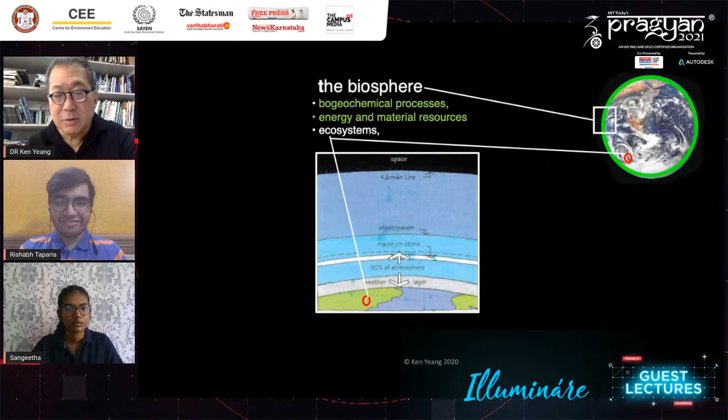Now, ecologists see the Earth covered by this thin film called the biosphere. Within the biosphere, there are the biogeochemical cycles, there's energy, material resources, and of course, there are units in nature called the ecosystems. The ecosystem consists of communities of plants and animals. Ecologists refer to these as the biological constituents and the physical constituents.

Now, within nature, there is human beings, which is part of the community of plants and animals, but we're different because we're the most powerful of all species in nature because we're able to change the landscape, we're able to change the ecology of the land, change waterways, change the seas and composition and the aquatic life, and now we've changed the climate.

Then the physical constituents includes our built environment, which is abiotic, and the built environment isn't just buildings, but actually everything that human beings make, which is cities, urban areas, structures, transportation systems, artifacts, and food, and so forth.

So now, in a diagram, our built environment takes in inputs from the biosphere and gives us outputs of energy, materials, and so forth. The inputs consist of energy, materials, water, food, people. The built environment has impacts over its entire life, which is the first environmental impact, the operational impact, the end impact, and gives out outputs of energy, materials, people.

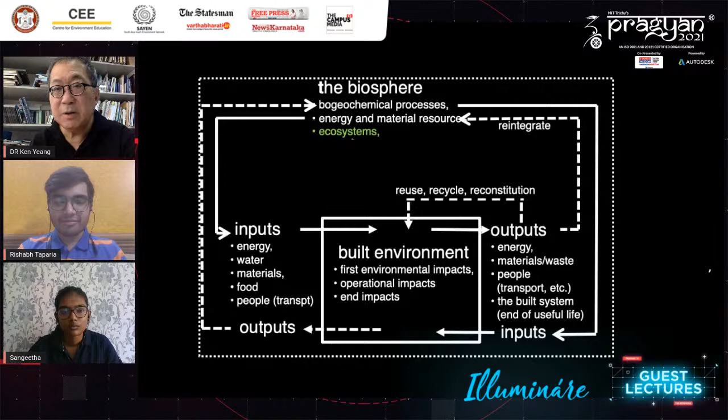The built system itself, at the end of its useful life, becomes an output, and these have to be either reused, recycled, reconstituted, or reintegrated. Otherwise, we'll just collect in the biosphere.

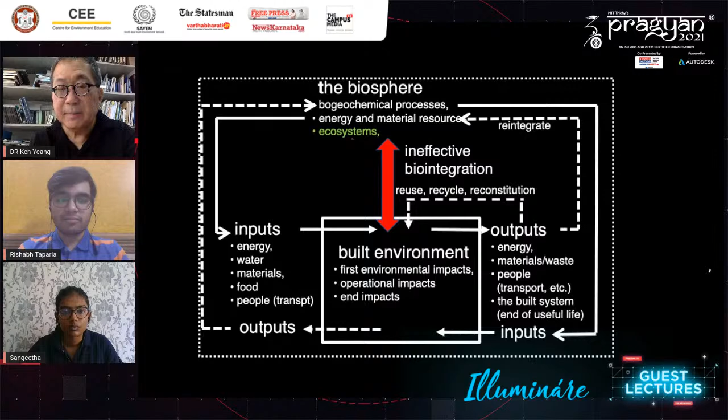Now, what has happened in the Earth now is that there is ineffective biointegration of our built environment with the biosphere. With the ineffective biointegration comes the contamination of the environment, the inability of nature to sequester the emissions they make out, and this has resulted in a devastation to our natural world.

Everything depends on effective biointegration. So whatever we do, there is similarity with what in medical sciences with the design and development of prosthetic devices. A prosthetic device is something that is artificial, it is synthetic, it is human-made, and in prosthesis it's attached to a host organism, which is the whole human being.

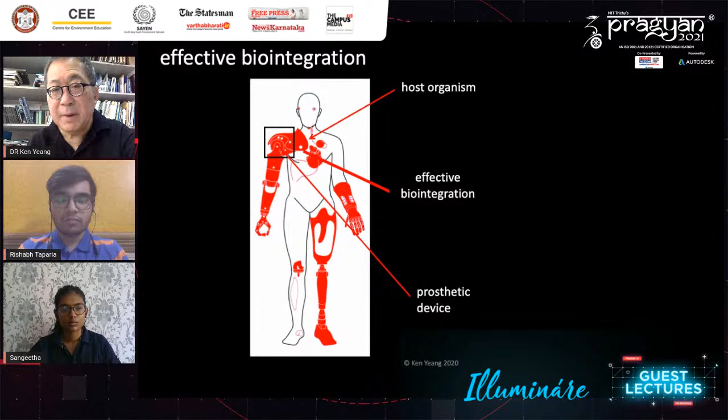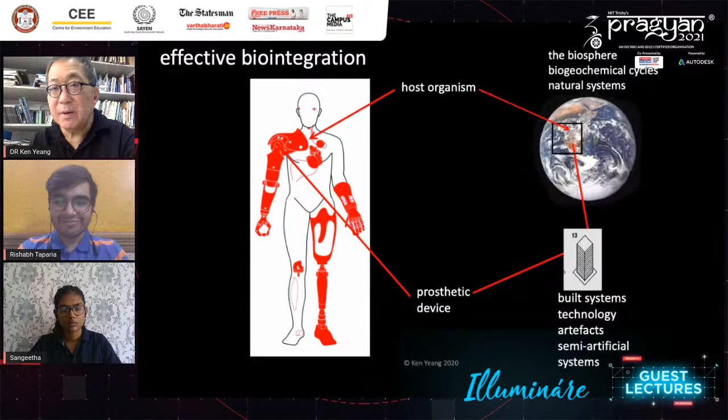Then everything depends on effective biointegration. Now, by analogy, our built systems are prosthetic devices. It is artificial, it is synthetic, it's human-made. So what is equivalent in the host organism? That's very simple. That's the Earth itself. So everything then depends on effective biointegration between the built systems and the biosphere.

If it's ineffective, then it causes environmental impairments. And so this is the idea that I had, which is the basis for all our work, is that what happens if our built environment is built to emulate and to replicate ecosystems, to become human-made ecosystems.

This is the challenge of ecological design. If we're able to achieve this, then there won't be any environmental impairment. Of course, this is easier said than done. This is what we must all strive to do, is to redesign our built environment to emulate and replicate ecosystems.

I'm going to go through some of these and show how we try to interpret this in our work. The first one is ecosystems biological structure. If you look at this ecosystem, it has communities of plants and animals and a physical environment.

If you look at the room, the building, the city you're in, everything is mostly abiotic, inorganic. There's very little biotic constituents. So if we were to design buildings as constructed ecosystems, then we must have a full complement of both.

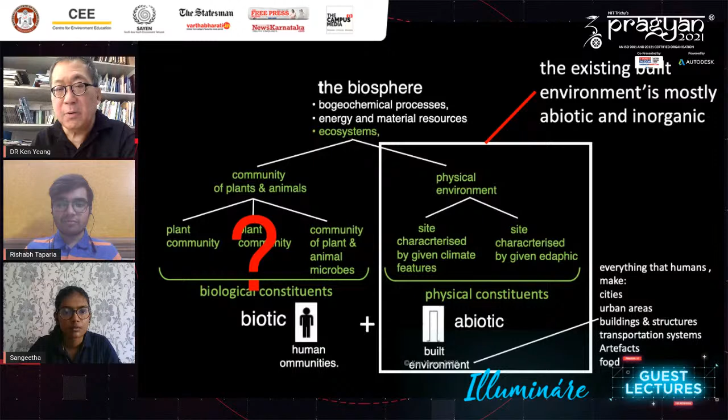From an ecological point of view, this is the most preferred because it is continuous. By being continuous and linked, there is a greater pool of natural resources to be shared among the species, and by being connected it enables species interaction. By enabling species interaction, it engenders a much more biodiverse ecosystem, and by being diverse, it's much more stable. So this is the preferred pattern.

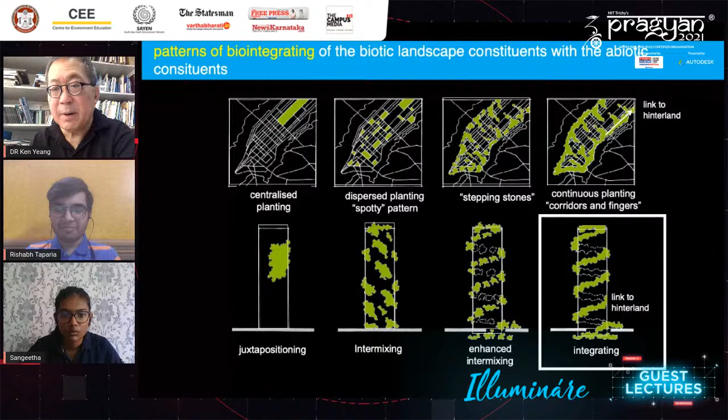So with this, I'll start looking at how we can integrate this by design in our built environment, in our buildings. This is one of the early buildings I did. I designed continuous vegetation starting from the ground, from the basement, moving up to the top of the building in a spiraling pattern.

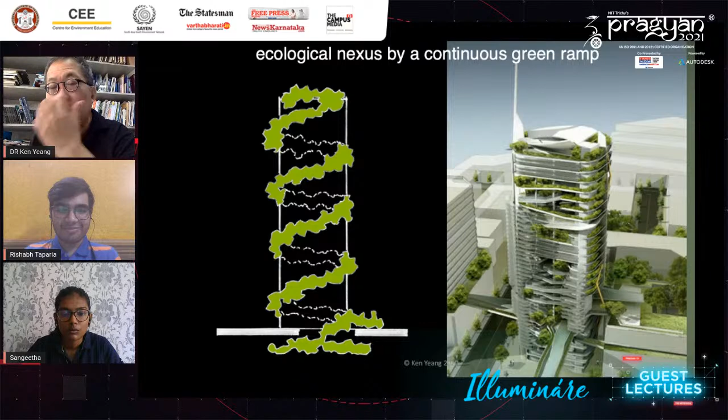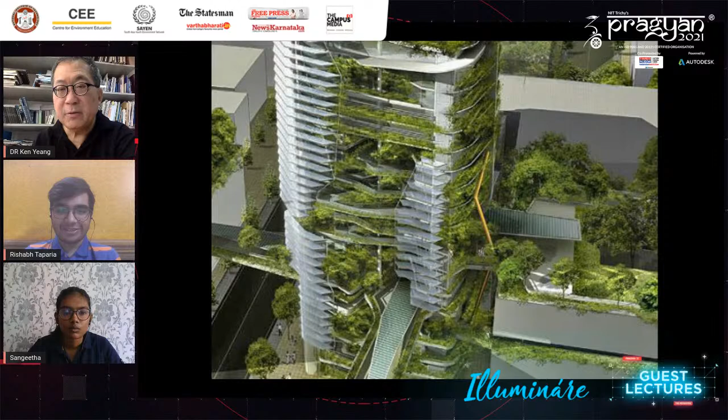So this is what the plan looks like. The vegetation on the outside is continuous, as a ramp going up the building. The whole idea was that as the ramp reaches the same level as the adjoining building's roof, you would then bridge over and vegetate the roof. In this way, this becomes the catalyst to making the whole city green.

This was an idea which was never quite implemented, but that was the principle of that project. The next is to look into ecosystems biodiversity. A built environment has very low ecosystem biodiversity because it's just us human beings and very small species such as cockroaches, rats, and little animals.

I started to look at different parts of the earth and its biodiversity, and you notice the biodiversity is highest near the equator, and it gets increasingly less as you go above in latitude towards the 70s. So the approach then is to create habitats within the built environment. Habitats could be green walls, green structures, green terraces, green atriums, green areas on the ground, and so forth. This is the approach we adopt whenever we design, to create habitats within buildings.

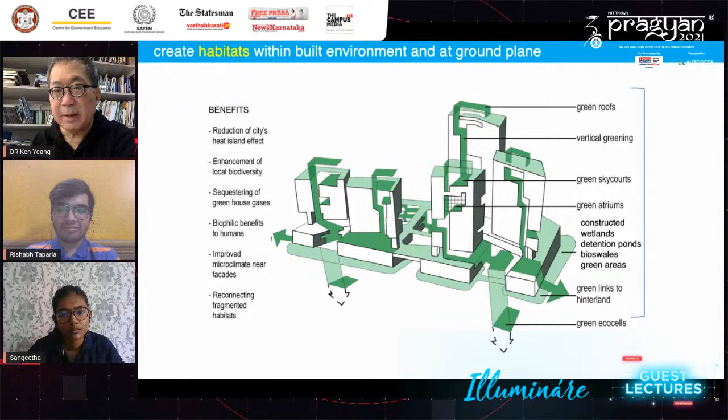Now, to illustrate this is the project that we recently completed about a year ago, in Putrajaya, the capital city of Malaysia. These are the habitats where we located them within the building, on the walls, the sky courts, on the ground, and on the edges of the building.

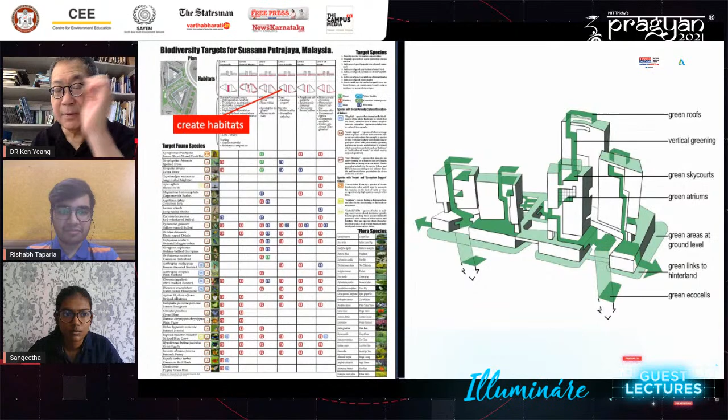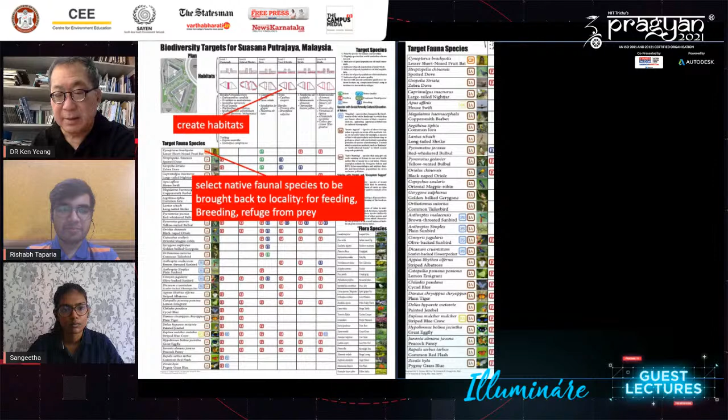From there, we look at the integration between the habitats and the species, and we use these as a basis for the landscape design and design of the habitats. So in a nutshell, this is our approach to increasing the biodiversity of the locality, to balance the biotic with the abiotic.

Now, if you look at some of my buildings, it's just an intention, an indication of what could be achieved, because it's very difficult to persuade clients to let us do this in an absolute thorough way.

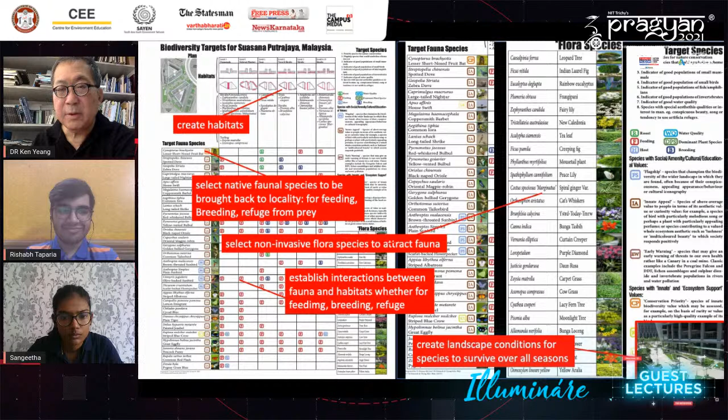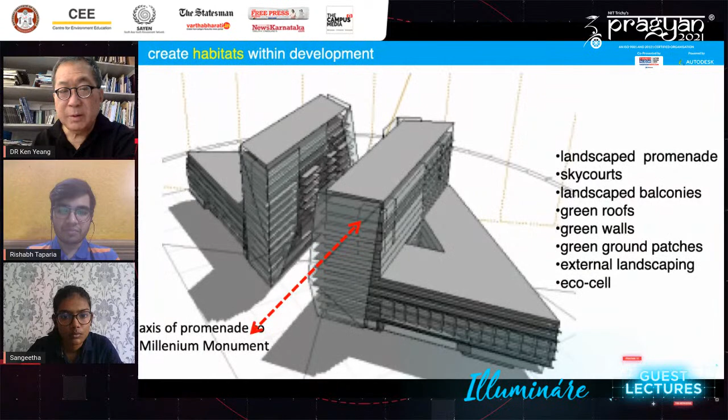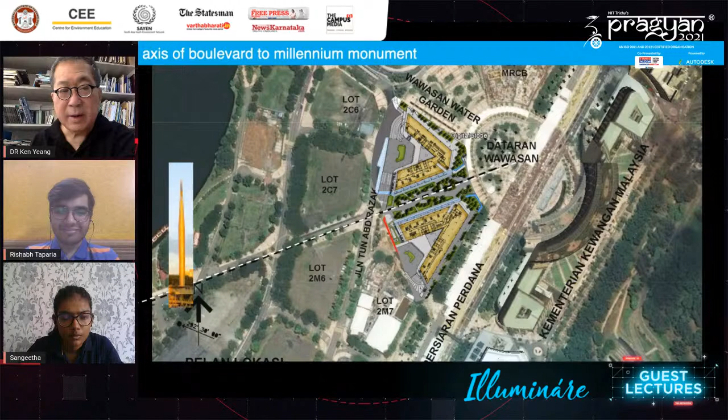Here's the master plan showing our two buildings, which are almost symmetrical chevron-shaped buildings from the square going down to the monument at the bottom. The monument is next to the Ministry of Finance buildings, designed by another architect, a friend of mine. This is a promenade between two buildings, and we put seating areas that people can sit and relax.

The facade is a double-skin facade where we experiment with fritted glass panels as an alternative to horizontal louvers. This is the pattern we want to give the facade, and then we slice it to make it more porous. The pattern we use is the cultural pattern of the Malay community. The first image is the outside, the fritted glass, about 50% clear and 50% opaque. The second image shows what it looks like from the walkway between the outer and inner skin, and the third shows the structural support for the facade.

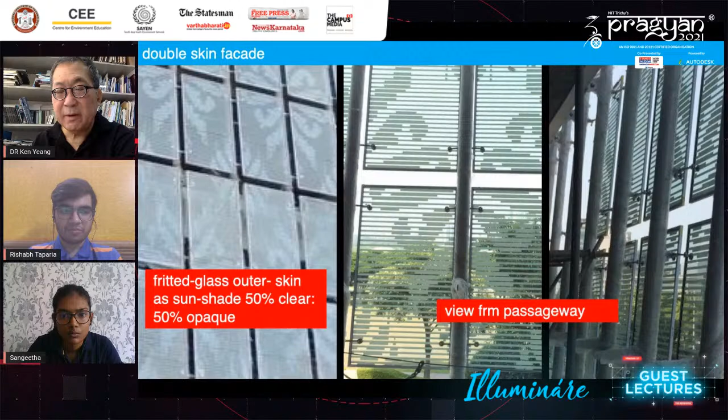The energy index is about 136.18 kilowatt hours per square meter per annum, compared to a conventional building, which is 210. So by all means and purposes, these figures and studies show that the fritted glass works as a substitute to the horizontal louvers.

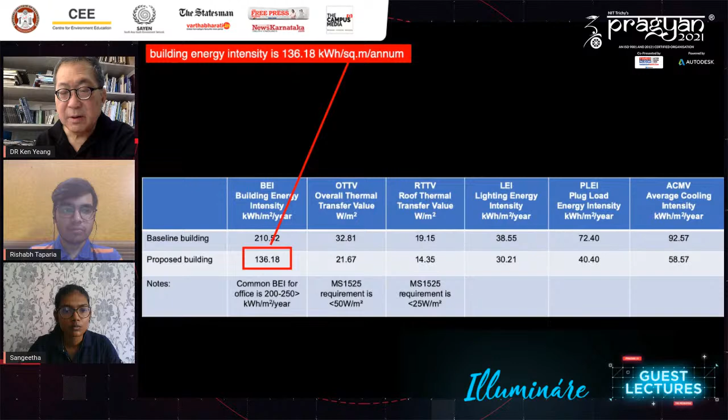On the west side, we wanted to protect from the hot western sun, and because the building isn't exactly east-west, we angled the facade to face the sun. The horizontal slots you see are actually the sky courts, and people can go out to look out, and these sky courts are now fully planted.

You should see a lot of vegetation in these sky courts. We also brought the vegetation all the way from the third floor down to what we call the Ecocell.

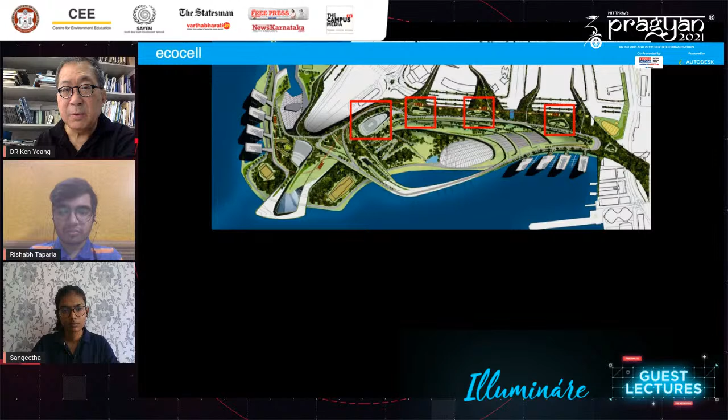The Ecocell is an idea we developed a few years earlier. This is our master plan for the Kowloon waterfront, and these are the Ecocells that we cut in the podium going all the way down to the waterfront. These are actually voids that go from the top of the podium down to the waterfront. It integrates vegetation down to the lowest floor, provides opportunities for rainwater harvesting and collection, and provides natural ventilation to lower floors. It brings daylight, and at the bottom we can put an eco machine or a biosphere.

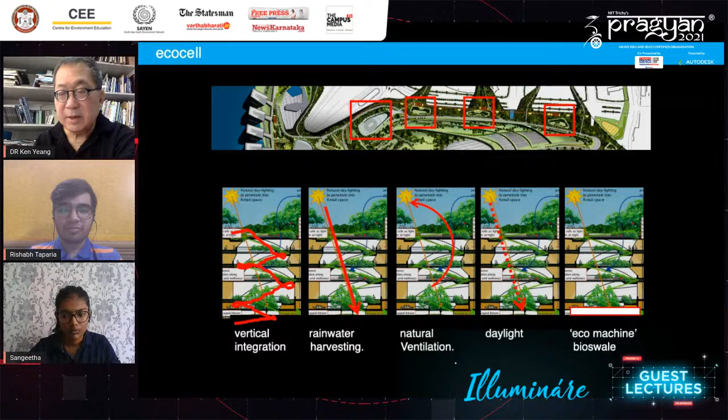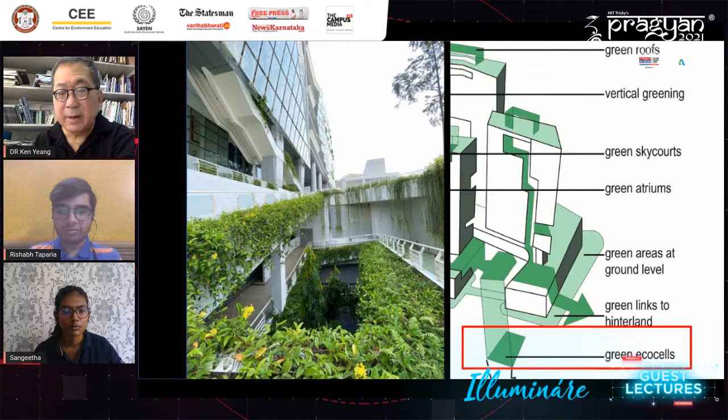So this was the Ecocell idea, and we implemented it in the earlier building. This is the Ecocell right at the bottom; we bring it down to the ground. Here you can see the vegetation from the third floor in a spiraling ramp going down to the basement.

Now, the next is ecosystem connectivity and nexus. What is evidently clear is that everything in nature is connected, and you cannot artificially partition the built environment, human society, one species, or one locality from the other. For instance, COVID has indicated that protection from infections actually has to be an international global effort.

So how do we connect nature, how do we enhance connecting nature? Because human beings fragment nature, they chop it up into pieces. One of the ways we try to address this is to bring an ecological network as a spiraling series of planters that goes all the way up to the roof.

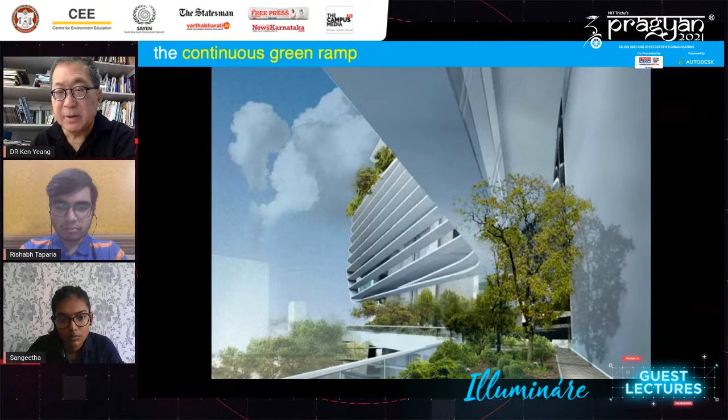We should connect not just at the ground floor, but also vertically, all the way up to the top of the building. For this building in Singapore, we put the planters on the outside of the facade, as you can see in this diagram. This time, we put a walkway so you can service the planters without going through the internal areas. Here it is built—you can see the planters, the walkway, the sun shading, and the glass facade at the back.

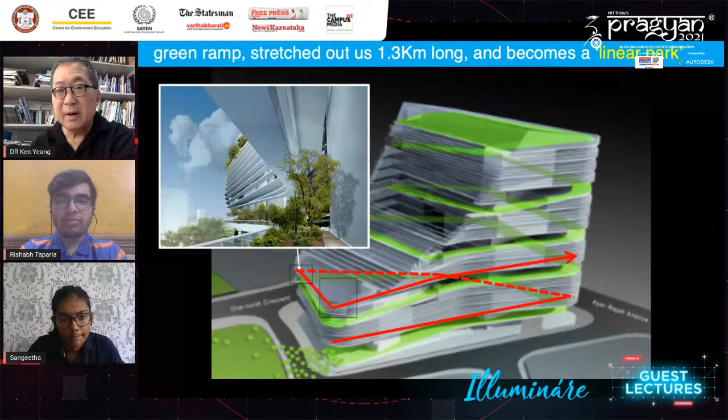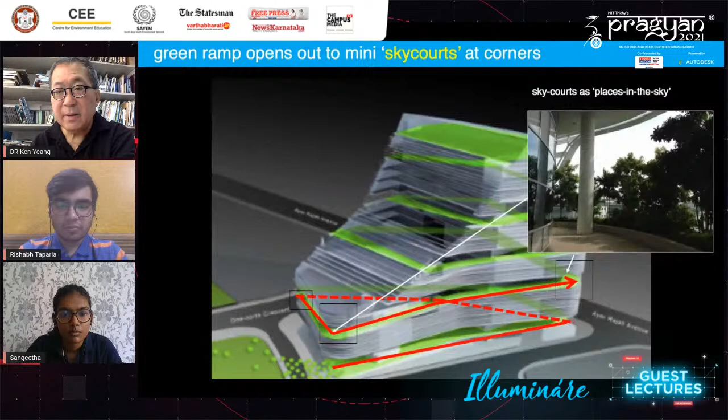For every facade, we climb up one floor, and we call this a linear vertical park. If you stretch it out, it's 1.3 kilometers long. You can see the walkway that spirals up the building, and then at the corners we punctuated with sky courts. These two sky courts at the corners bring daylight and vegetation, so the linear park opens out into these sky courts as it reaches the corner.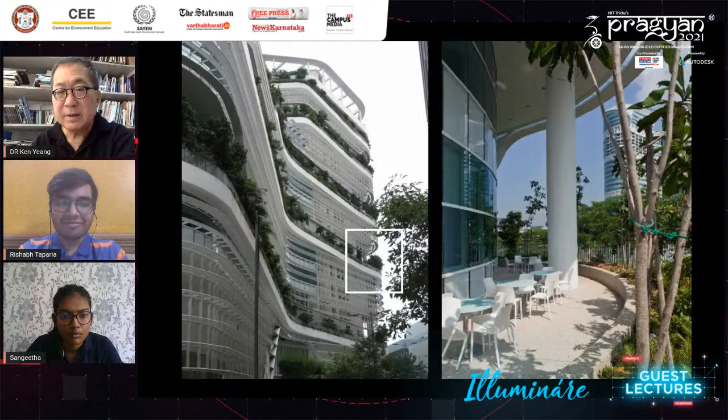These obviously provide spaces for people to eat and to drink and to have a cigarette if they wanted to. I call this the mini plazas at the sky courts at the edges of the building.

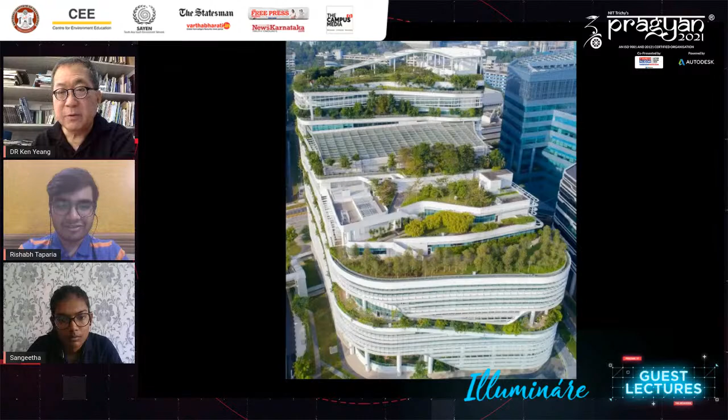The building actually consists of two components. At the mid level I have a roof garden, and this is the mid level roof garden, and the top is the roof garden itself with a panoramic view of the surrounding.

The green index required in Singapore is 6 - that means the ratio of greenery off the ground with the green in the building. Here we achieved 12.2, so we far exceeded the green index required by the authorities.

The building is actually two components, A and B, linked by an atrium, and the two blocks are linked by a bridge.

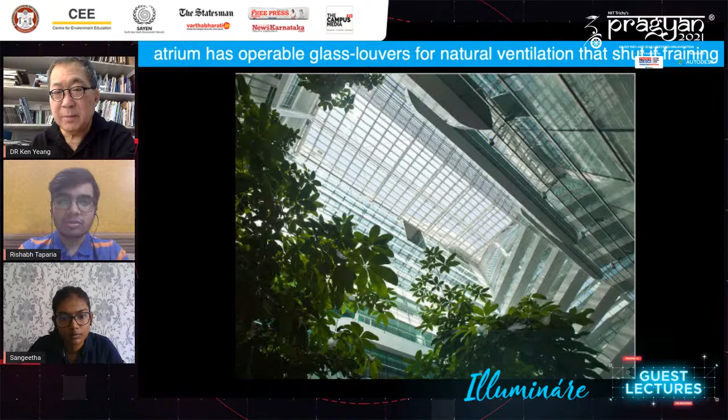This is the atrium between the two blocks, and above the atrium is an operable glass louvered roof, which is open most times of the day so that hot air can go out. But if it rains, it has automatic sensors so that it shuts and is closed to keep the rain out.

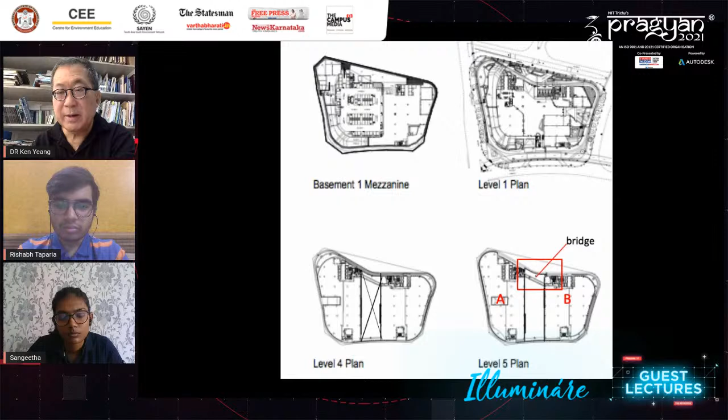And then the two blocks are linked by a bridge, as you can see in the bottom right-hand plan, and the bridge links the two blocks together. And then we have a number of experiments in this building.

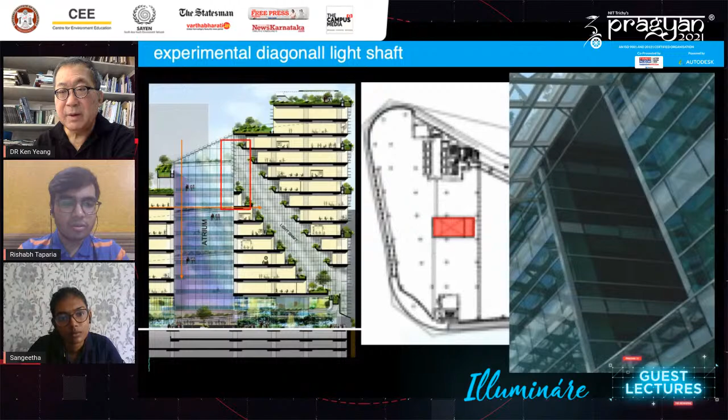One of the experiments is what we call a diagonal light shaft, which cuts all the way down to the bottom of the building. At the top of the light shaft, it opens out into the atrium, and from the bottom looking up, you can see the atrium roof, and looking down, you can actually see the street.

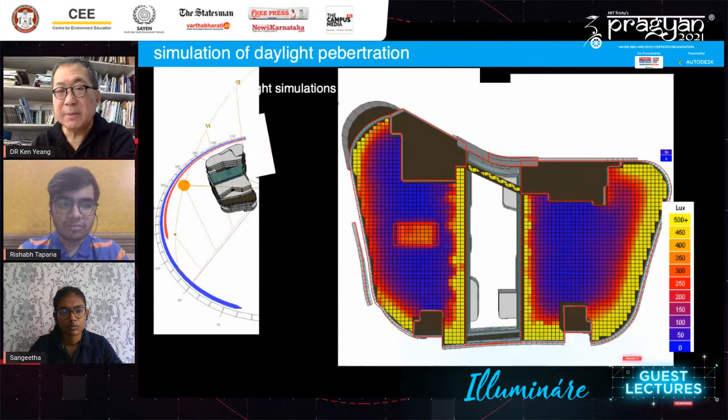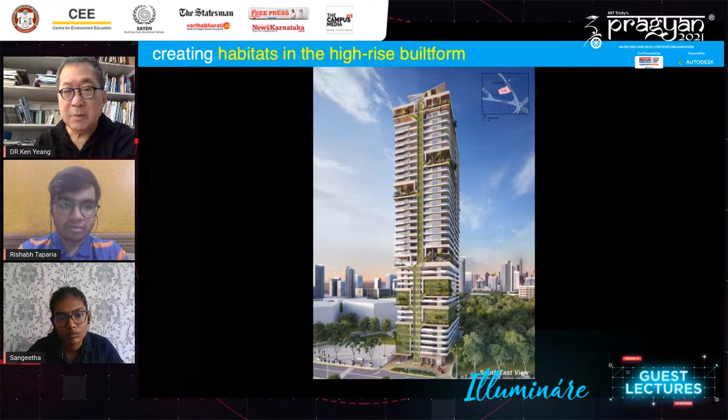Now, how do you do this with a high-rise building? This is one of the buildings now under construction - it is the Skylon building - and we start by looking at the biodiversity around the site. The site is that red dot you can see there.

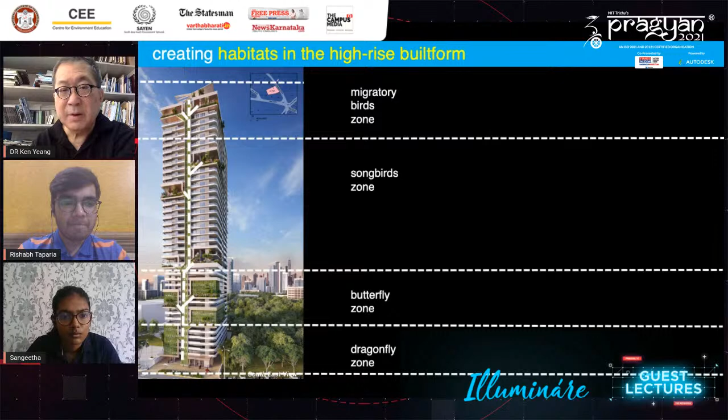We look at, we study the species in that area, and we concluded that one of the ways to do this is to create vertical habitats in the building and use it to attract birds and butterflies and insects. So the lower floors we call the butterfly zone and the dragonfly zone. The middle is for the birds, songbirds, and the top is for migratory birds.

This is the biodiversity matrix for the entire building, which is the vertical biodiversity matrix. So that was how we adapted the idea, the biodiversity matrix idea, to a vertical building instead of a medium-rise or low-rise building.

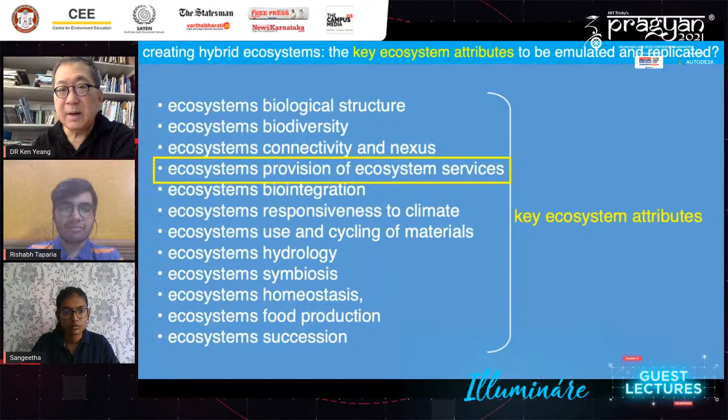Now, the next property of the ecosystem that we need to emulate is the provision of ecosystem services. What are ecosystem services? Ecosystem services are services that nature provides for us without any human intervention.

Nature does this for us for free. Nature produces oxygen, maintains the biological and genetic diversity, purifies water and air, provides storage and cycling of global distribution of fresh water, regulates the chemical composition of the atmosphere, and maintains migration and nursery habitats for wildlife, and so forth. All these are done by nature without human intervention.

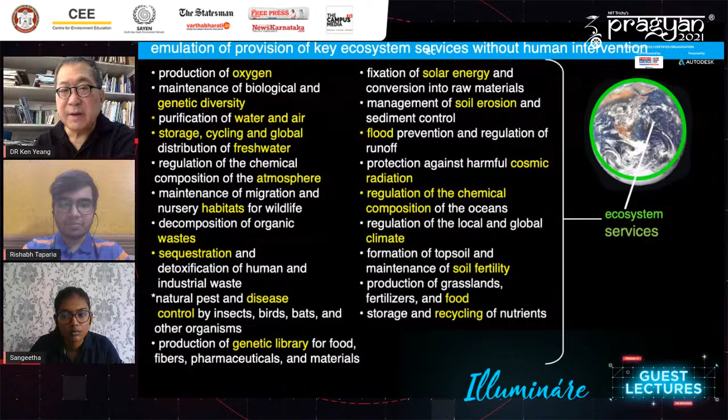So we need to try and emulate this if we can in our constructed ecosystem. Then it became clear to me that it is such a massive task, it's impossible to do this technologically.

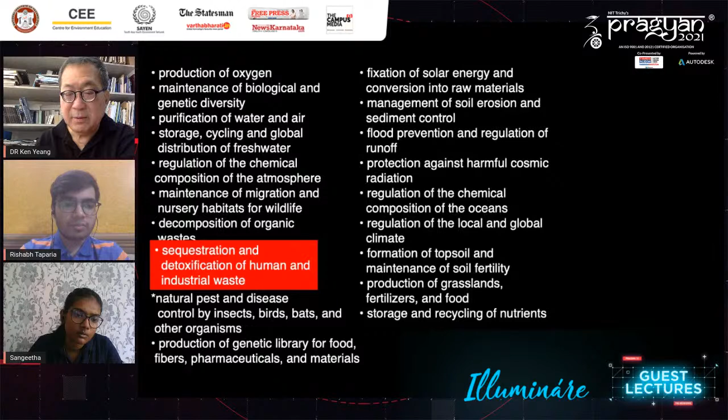So what we try to do is use as much technology as we can to emulate it, like this building in which we emulate the production, photosynthesis, and production of energy. Nature sequesters and detoxifies the emissions that we discharge into the environment.

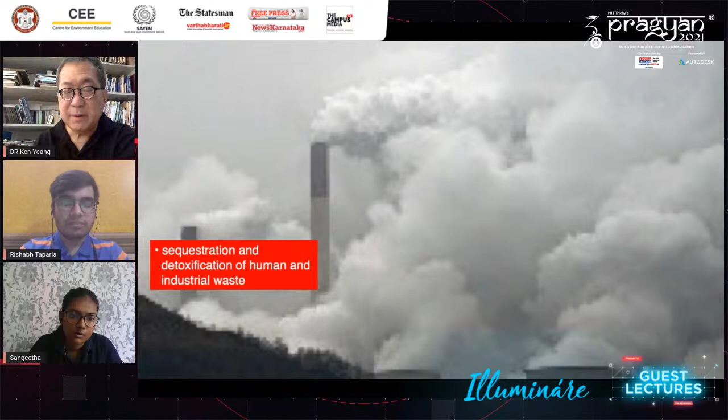But what is clear is that we cannot do this 100%. Nature is too big, too vast, too capable to do this. But what we have done is the opposite - we have emitted more gases than nature is able to sequester. Because of this is the cause of contamination of the biochemical cycles, and this is the cause of climate change. So I started looking at ways to how we can emulate the production of ecosystem services.

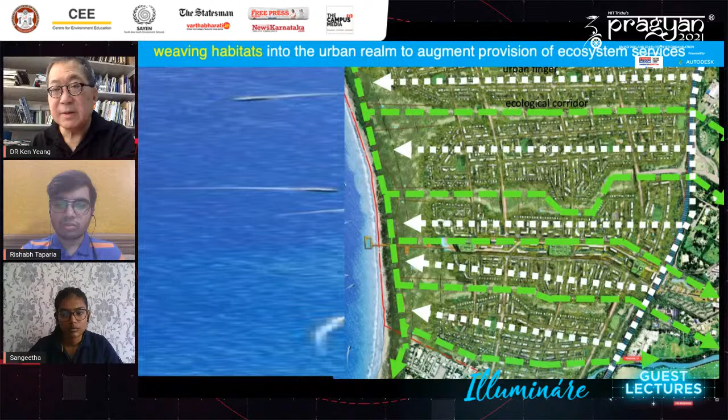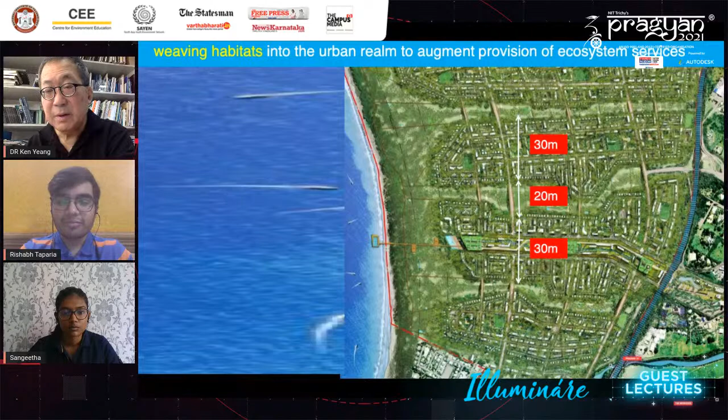The green fingers are close enough to the urban areas to provide ecosystem services into the built area. We cannot replicate ecosystem services, but we augment the urban areas with green areas. This is what the master plan looks like - the white is urban areas, and we try and weave the two together like clasped hands. Our design has about 30 meters between each finger, 20 meters wide for the ecological fingers, and 30 meters for the urban areas. That was the approach to provide ecosystem services into the built environment.

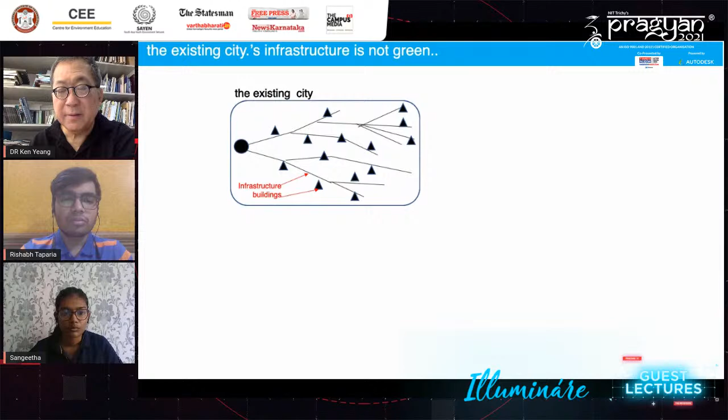Now, on ecosystem bio-integration - what is clear is that our present approach is inadequate, because if you look at the city you're in, it has existing infrastructure which is not green. So what green architects do is build green buildings onto the existing infrastructure. Some of these green buildings are autonomous and can exist without the infrastructure, but most still need the infrastructure as a supplement.

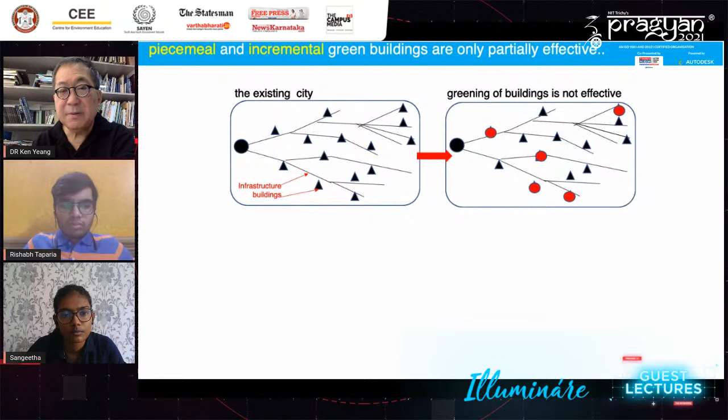So the proposition is: what happens if we start with the green infrastructure first? Then it makes the green city much easier to produce. What this means is that if you are a green architect or planner, you must start with the green infrastructure first - make the infrastructure first. Then all the buildings we put in are much easier to make into a green city.

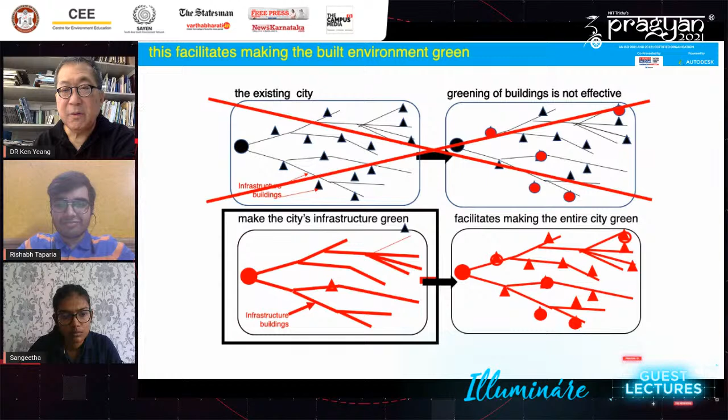So this is a different level of thinking. If I were to leave one idea in your head when you leave this lecture, it's this: start with the green infrastructure. Design the infrastructure - the electrical system, the water supply system, the energy, the sewage system, and the IT system - to make it green before we start working on the green buildings.

So I started to think that maybe the key infrastructures is nature, which itself is infrastructure. Human society - our social, economic, political, and educational institutions - is an infrastructure. Then there's water. Although water is part of nature, I've taken this out because water is what life is all about, and the hydrological cycle is infrastructure. And then there's our built environment, which is two levels of infrastructure, external as well as internal within buildings. Ecological design is the integration of all these four together into a whole.

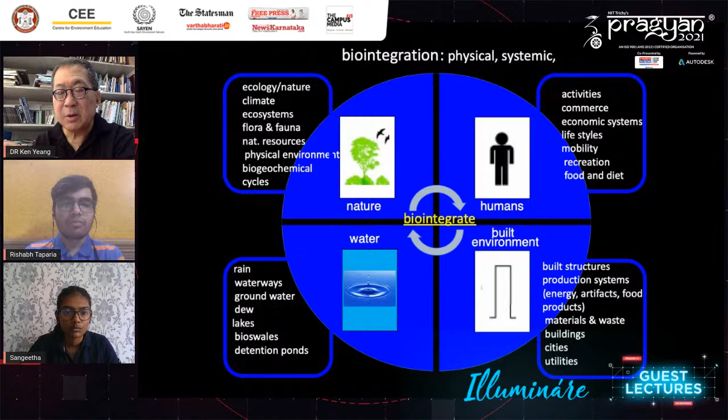Now this is a diagram of aspiration. To effectively achieve this is extremely difficult, and this is what we must all do as ecological architects and planners. Of course, if you so lead and list this out, then there are a lot of things to be done.

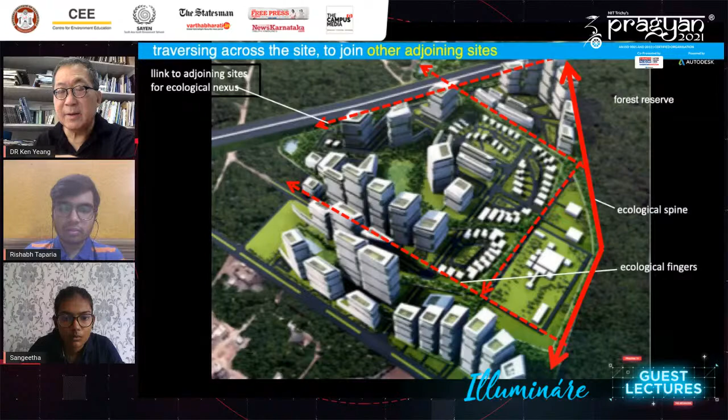Now this is a scheme we designed in Bangalore, where a development is right next to the forest reserve. The approach is to start with the ecological spine along the forest reserve to collect all the species, then bring it through the site in a series of ecological fingers, and connect to other sites so we can extend the connectivity, the ecological nexus, to surrounding sites. So this is the master plan - you can see the spine on the right-hand side, brought through to the edge of the site and surrounding areas.

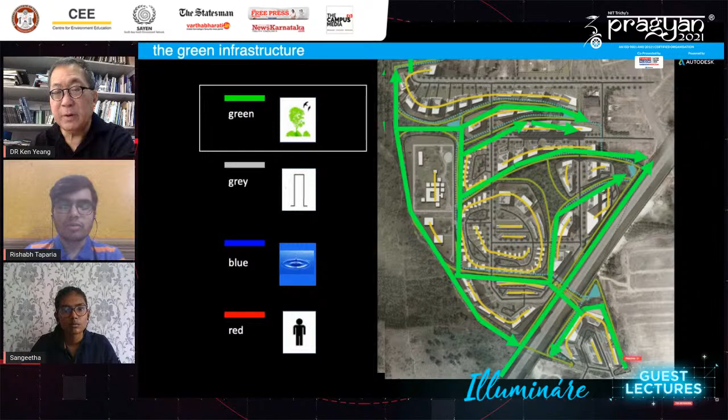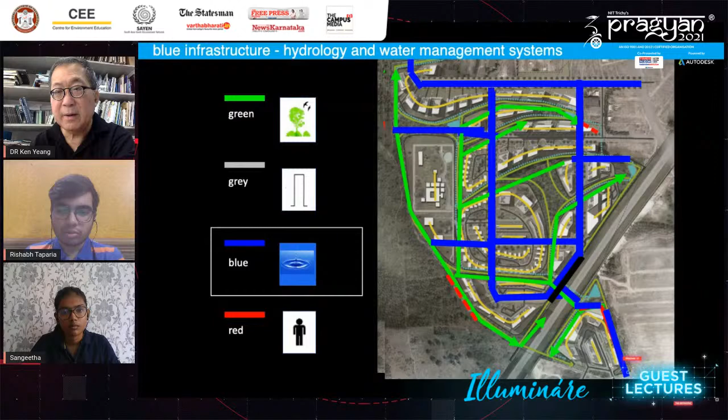And this is the green infrastructure. For master plans, we start with the green infrastructure before we do anything else. Then from there, we lay the roads - we call it the grey infrastructure, where all the utilities are located. Then there is the water infrastructure, where the drainage and water supply go. And then from there, we have the human society layer - the walkways, pedestrians, green areas and buildings.

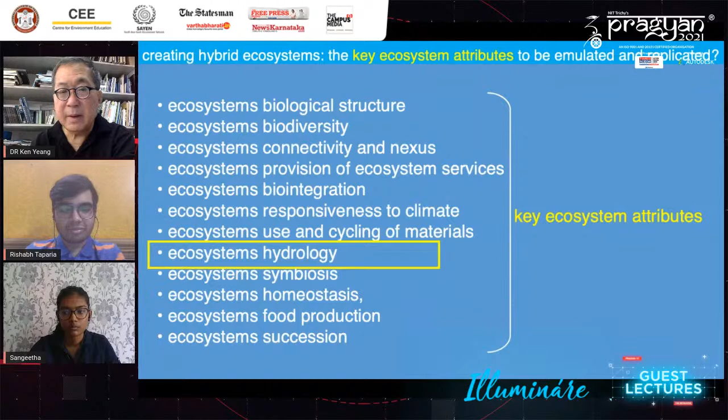For the black water, we have a series of ponds called constructed wetlands, so that the black water, the sewage, is treated without using mechanical means.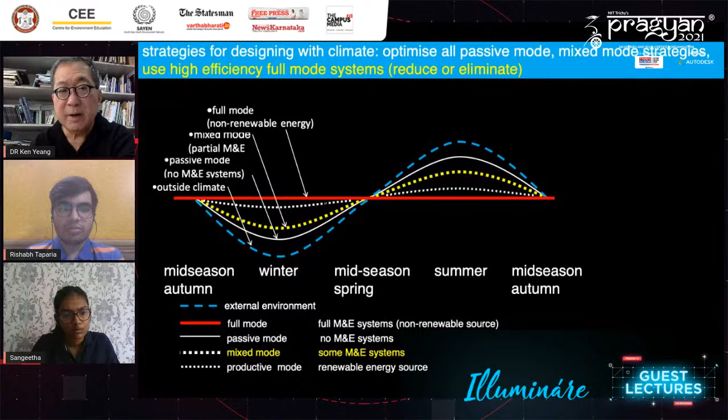You can improve on the blue line, improve on external conditions. Then if you use some partial mechanical systems like ceiling fans and exhaust fans, you can increase the comfort level a bit more, along with the amount of energy used. I call this mixed mode, because it's not full mode like the red line. Then you can have a productive mode where you try to use renewable energy, and the red line is the full mode.

If you look at the seasons, you have a very cold season and a hot season in the temperate climate, and then the mid seasons, spring and autumn, where the comfort condition is quite pleasant. The low energy approach is to try to extend the mid season as much as possible, reducing the need for air conditioning in summer and heating in winter.

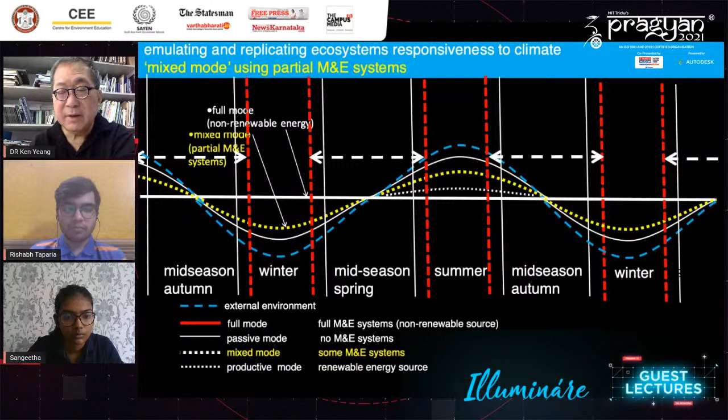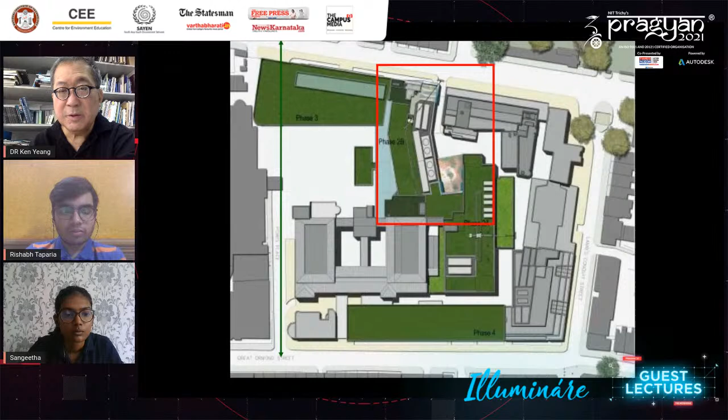To do this, we can have a number of ways. One is to create a flue in the building so that it sucks the air out during the mid-season. This is the Great Ormond Street Children's Hospital extension we did back in 2010. We created a flue on the outside of the building, which sucks up air from the lower three floors to reduce energy consumption.

There's a valve in the lower floors and the upper parts of the building. This is the lower floor of the building — it sucks the air up to the ceiling during the mid-season. By doing so, it lowers the ambient temperature and reduces the use of energy in winter and summer.

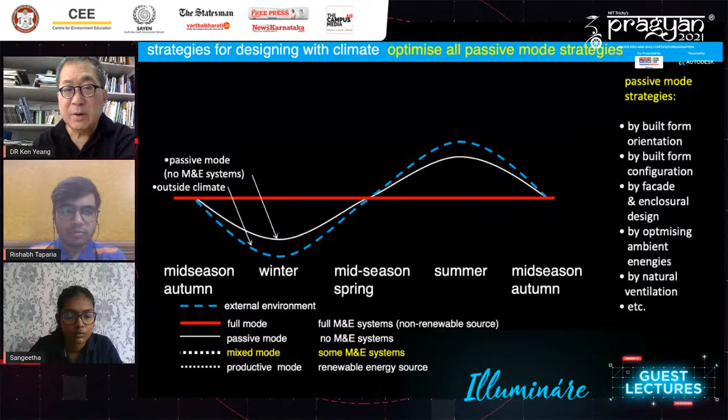Then we start to look at how we can shape buildings to lower energy consumption. If you have a tower, you can place the core either at the center of the building, at the sides, or at the north and south — different orientations. Locating the cores on the east and west sides reduces the thermal solar energy entering the building on those sides, especially in the tropics.

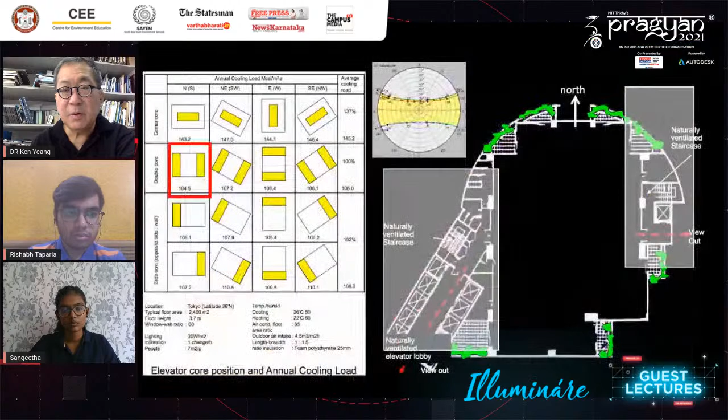You can see the sun path in the middle of this diagram. With this building, we put the core on the east and west sides, and put planters on the edge of the building.

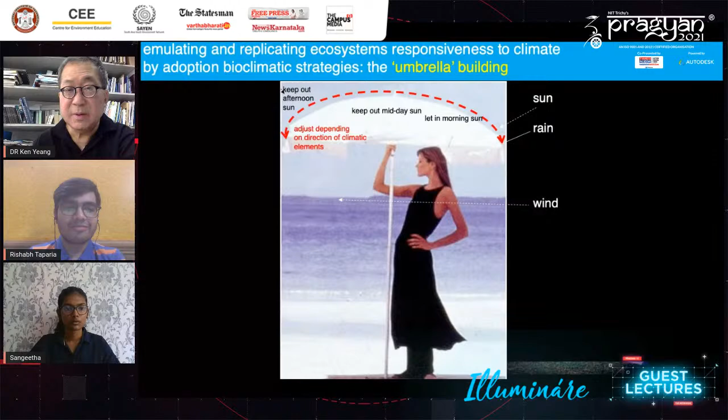Another idea we had is, what happens if we have a canopy building? A canopy is like an umbrella — an ideal cybernetic canopy, because it keeps out the sun, wherever it is, by angling or twisting the umbrella to keep out the sun, wind, or rain. My ideal is to design a building as an umbrella building where the umbrella itself is operable. I haven't been able to do this yet, but I hope to, if I have the opportunity.

This is the university hub that we designed, where we use the same fitted glass idea as an umbrella over the hub, so people can walk from one part of the building to another without getting wet.

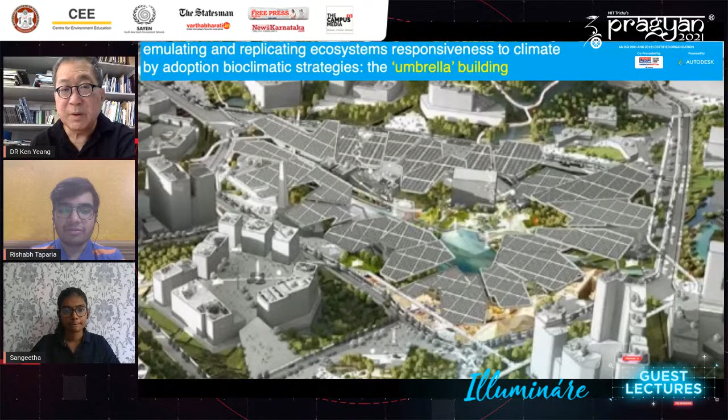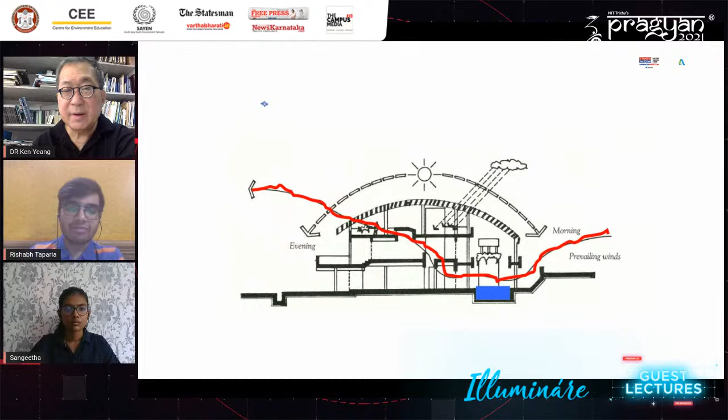This is the house that we did back in 1985, where the umbrella became a louvered roof. This lets in the morning sun and keeps out the afternoon sun, and is perforated so that ventilation can go through the building.

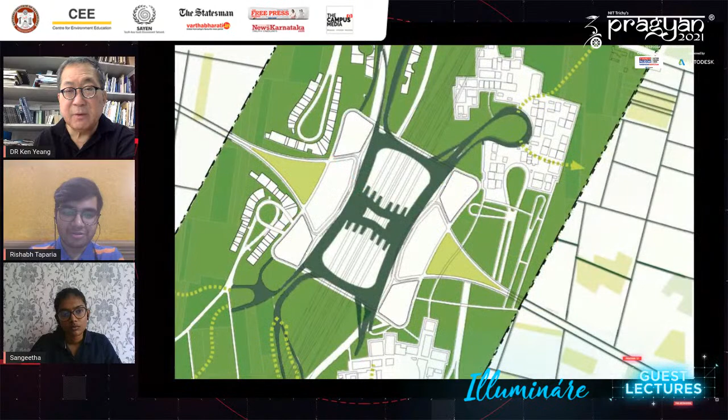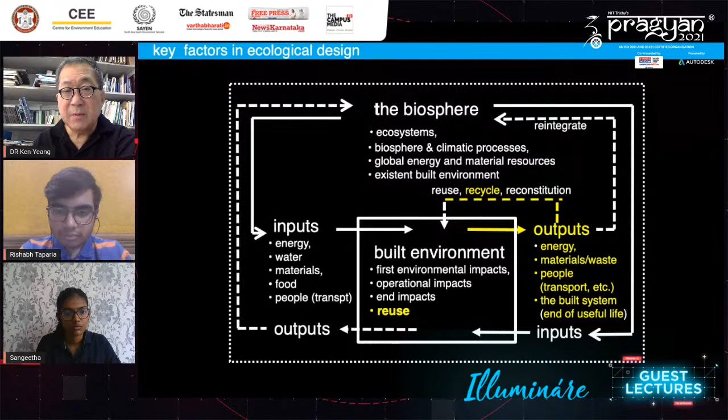Symbiosis is where one species and another species live in harmony. At the same time, we look into how we can reuse, recycle, and reconstitute materials. These are the characteristics of what we call the ideal eco-city, summarizing all the factors presented earlier.

Now, I haven't completed everything that is there. I haven't been able to design the entire attributes of the ecosystem in a white square for those items which are still outstanding. I hope to do this within the next period of time, as much as I can. Now I'm going to end in a minute.

These are the four basic infrastructures: the green infrastructure, the grey infrastructure, the blue infrastructure, and the red infrastructure.

Now, assuming that you and I are able to design the ideal built environment, we're able to reconnect and build this as the constructed ecosystem. But the last infrastructure is us as human beings, because we cannot control human beings, not all of them, 100% of the time.

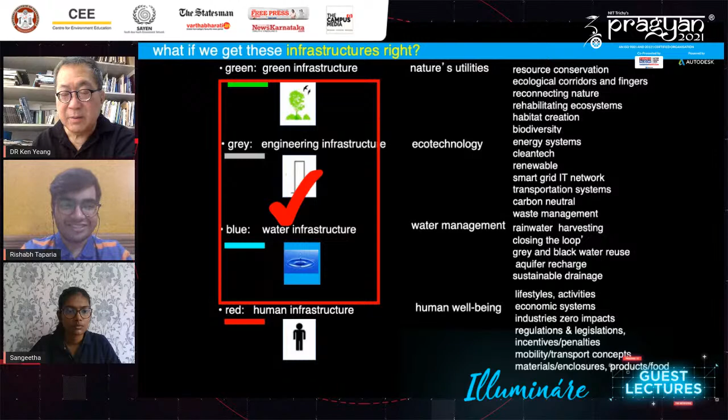So what happens if human beings don't behave? What happens if we misuse our planet? We use our infrastructure, we misuse it, we have unsatisfactory, non-sustainable habits. So then everything depends on us as human beings.

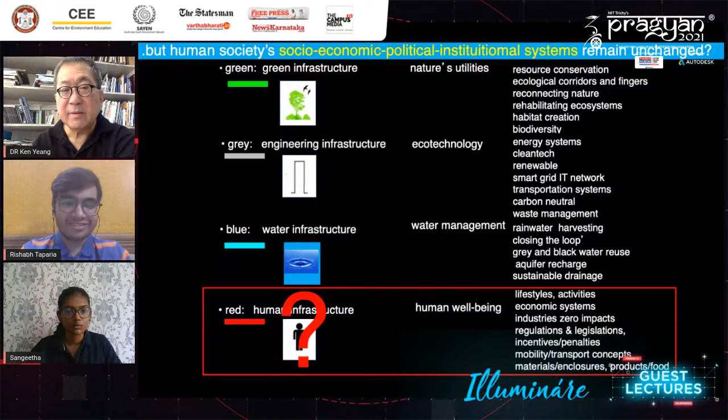So ecological design isn't just designing buildings. Us as human beings have to change. We have to adapt ourselves to a much more ecological way of life. So I'm going to end my lecture now, and those are the key factors in ecological design.

Thank you, sir. That was very insightful.

And I hope all of your interventions become reality one day. Right, so now we'd like to go into a few questions. Sure, okay, sir. Yes.

Sir, you received your PhD from Cambridge University back in the 1970s, so there were no CAD or other software tools back then. How was your experience as a student, and how do you think the field has changed since that time?

Could you repeat your last two sentences again? Okay sir, so back in the 1970s, when you had completed your education, there were no CAD tools and other sophisticated software. So how was your experience as a student, and how do you think the field has changed since then? Oh, I left Cambridge back in 1976.

Yes sir, there was no engineering support, absolutely none. I had to do everything myself, which was very slow, very tedious, and I had limited capability to do it. So I thought the easiest way to start was to design passive, low-energy buildings. That's how I got started into bioclimatic design, back in 1976.